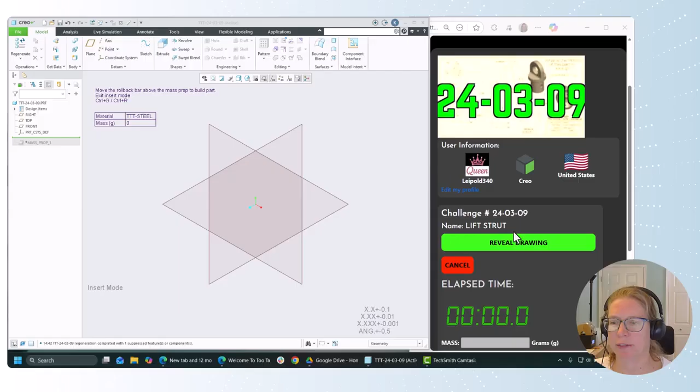This is a tier 5 part called the Lift Strut. We are in grams and let's jump in. So I'm going to start with the bottom part, the nice cylinders. Just going to do an extrude on the top plane. Just a circle. Got a diameter in the top view, it's 38. I want to flip this the other direction and a depth of 36 that is shown in the front view.

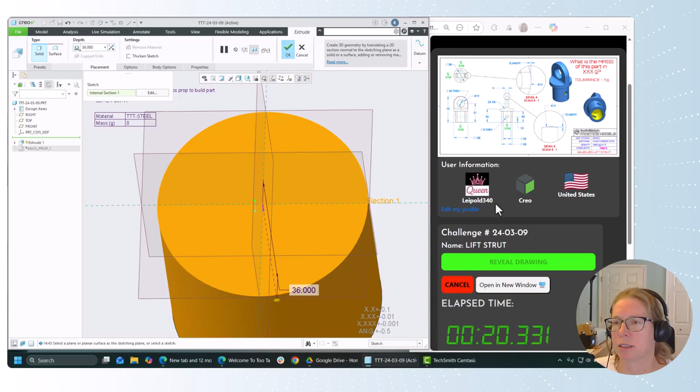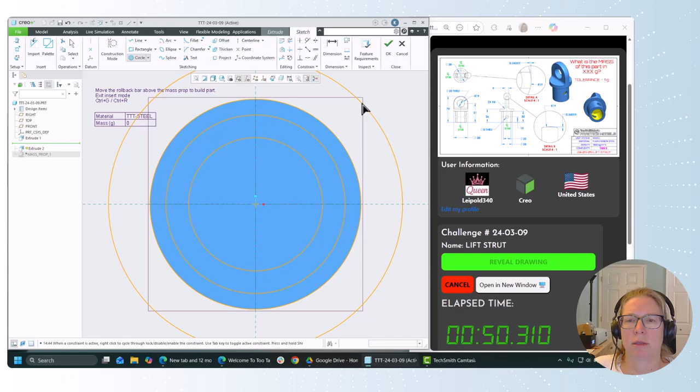Quick little clear appearance thing here. Actually, hang on, there we go. Okay, so now we're going to add another extrude. We're going to place it on the bottom, and this time we're going to add some concentric circles. So we'll select the outside circle, and we'll just put a couple of circles in here associated with them. Middle click to finish that. The center hole has a diameter of 20. The next circle out is 28. And there we go.

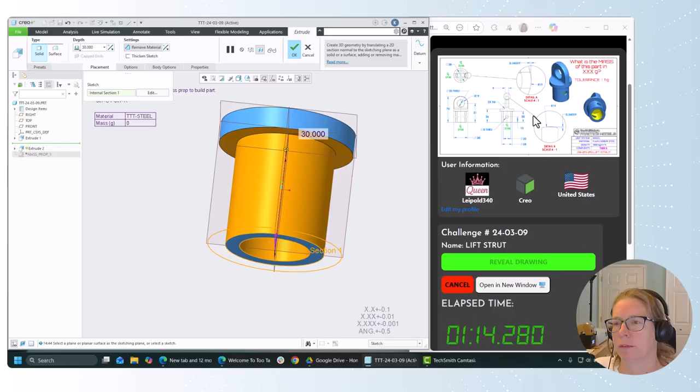So we want to flip the other way, which means we're going to remove material. We want to go a depth of 30. Again, from the front view. Looks good. All right, to make this top portion, we do want to make sure it kind of follows this outer circle shape. So I'm going to extrude from the top.

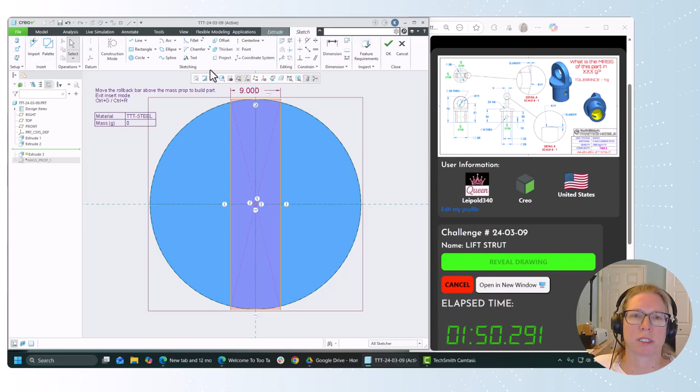And actually, I'm going to do a center rectangle. And we'll make it tangent. And this is 9. But I don't want those portions. So let's actually do a circle as well. We got a lot to trim. So let's use this trim tool. And we're going to trim here, here. Same thing up at the top. So we just kind of drag through there.

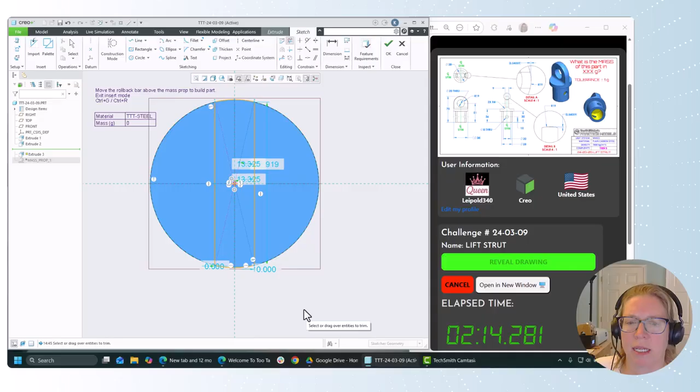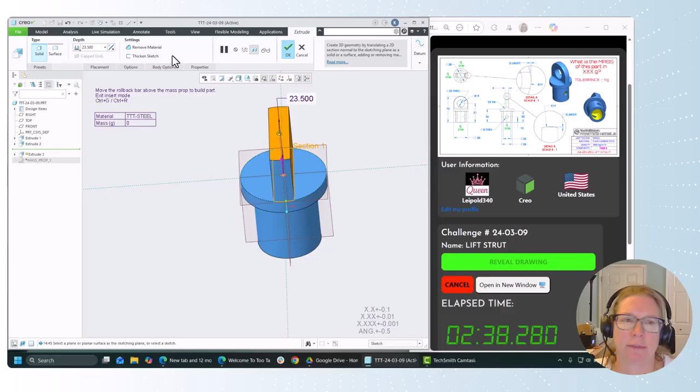We've got way too many dimensions. All right. Okay. So I want the dimension as the width. All right, that looks good. We got there. Height coming up. We are not given it, but we know that we have 36 and then 59.5. So this dimension is 59.5 minus 36. Okay. And now we can add some geometry to that face.

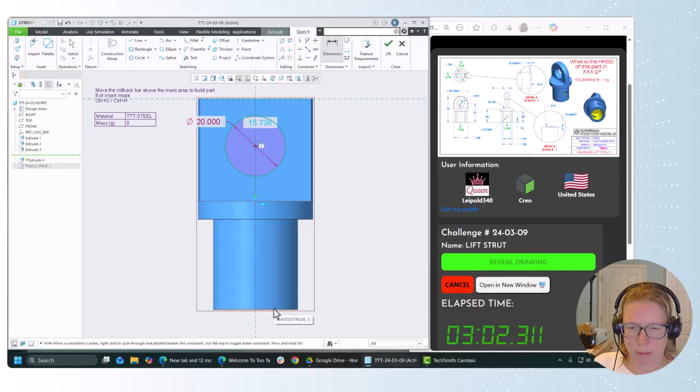Okay. We got a hole in the center here. Diameter is 20. And it's located 51 from the bottom. We also have an arc. Actually, let's do that as a separate feature. So let's flip and through all. And let's do this top feature not as a round because we need to kind of follow this shape here. So let's do that as a revolve.

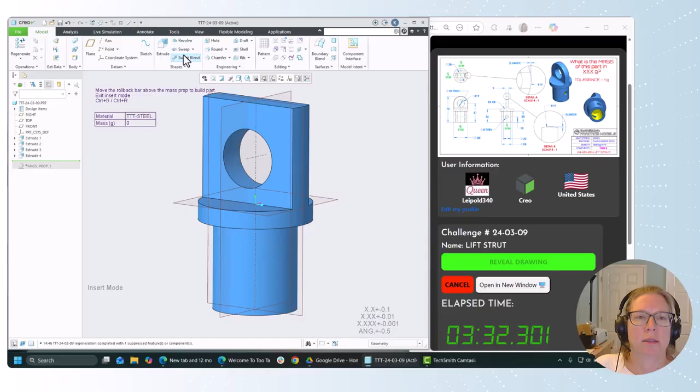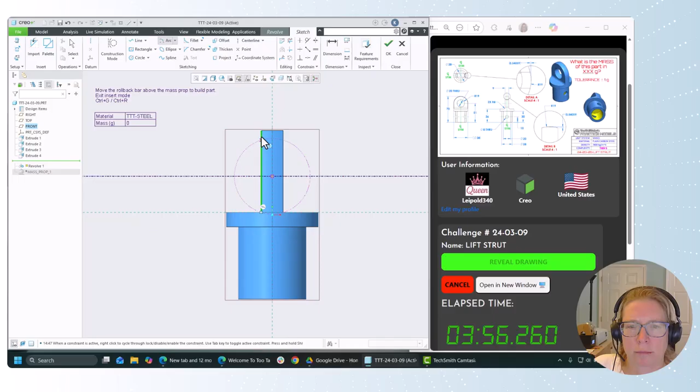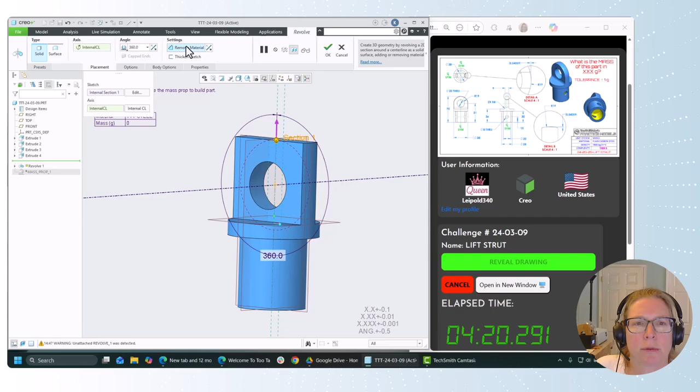We're going to sketch that on front plane. Use an axis of revolution right on top of this axis here. Don't think I got that. Let's try that again. There we go. I'm going to use a center point arc. I think I got the wrong one, I think I delete that one. There we go. I need this to have a radius of 19. All right, and we're going to flip outside and remove material. All right, it's not very happy with me right now. There we go. Isn't that beautiful?

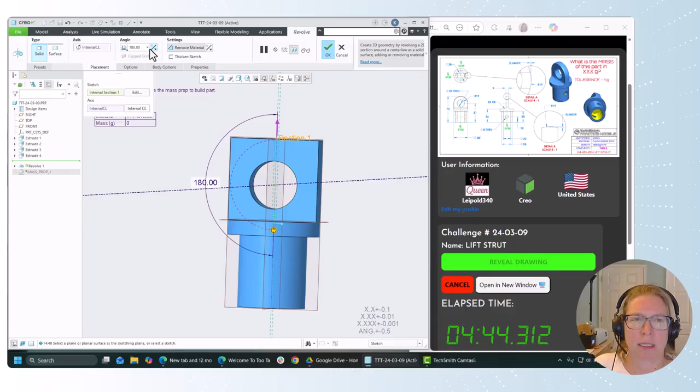So most of the time with revolves, we do 360 degrees, but we don't have to do 360 degrees. So we've got options here, but you can type in anything. If I had left it on variable, I could have done one side or the other. When I switch it to symmetric, it's happy. Okay. All right, let's add in a few rounds with a radius of 4, I believe. Yes.

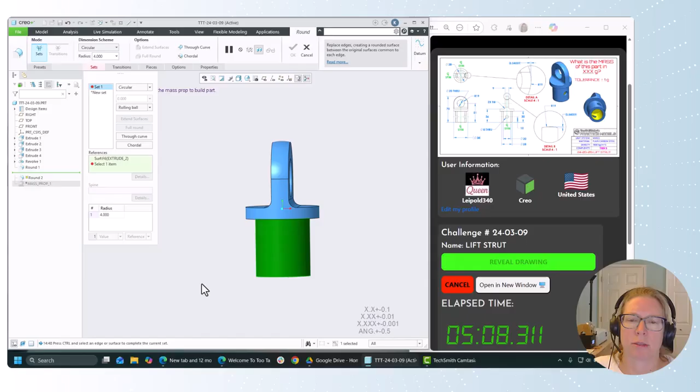And then add the hole. So the hole's going to go right here. So the radial hole placement type is, oh, wrong tool. The radial hole placement type is one of my favorites. It means that we don't have to create a plane and a tangent and all of that stuff. We're going to go through all. Our offset surface is going to be the right plane, and we'll set that angle to 0.

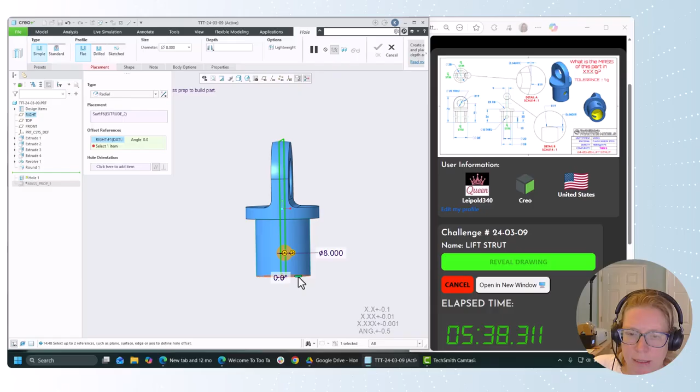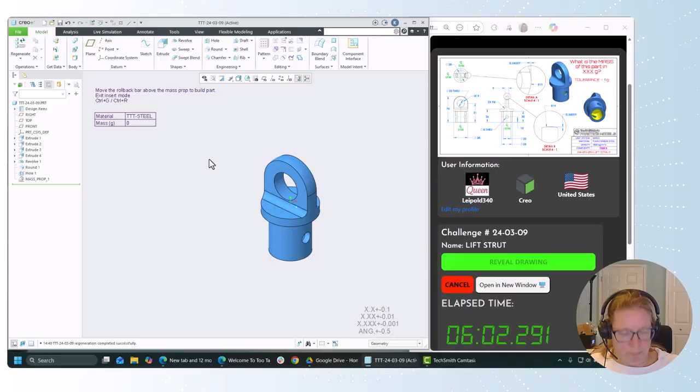A lot of times I like to use the drag handles. However, in this case, I don't have my planes turned on, so I just selected the first one. I could just select the second one as well, but I'd have to hold down Control. All right. So there's our lift strut. It's looking pretty good. Let's see how we did. Steel. Let's try our answer. Hey, we got it. Awesome.

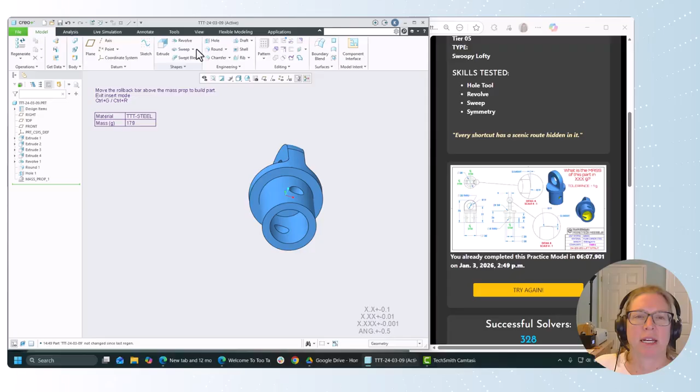So tier 5, the nuance here is this round around the outside. You'll notice if I show you here this yellow surface, I tried to simulate that and I got an interesting error. I guess you'd call it an error. That I can't just get the inside. So there's a whole other video just about applying appearances if you're curious about the nuances or quirks in Creo about applying appearances. All right, thanks.